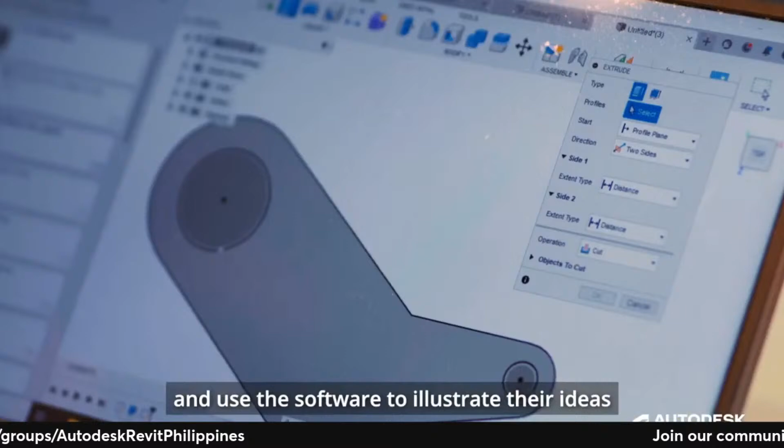We have donated about 20 canes to the Society of the Aged Sick and St. Luke's Nursing Home. Fusion 360 allows students to draft their design and use the software to illustrate their ideas and inform their discussions. Fusion 360 can be easily downloaded to a student's personal laptop and it is user-friendly.

Our students knowing Autodesk products gives them an edge in terms of future employment. To be a leader in manufacturing education, one has to keep updated with industry needs and standards. It is essential that one trains students to have the latest skill sets which help them progress in their career.

We connect with industry through facility visits, seminars, and attending professional development courses and outreach programs. I think Autodesk plays a role in fostering and facilitating our connection with industry. Some of our students are already connected to EIA companies that use Autodesk. My advice to students is to never stop learning.

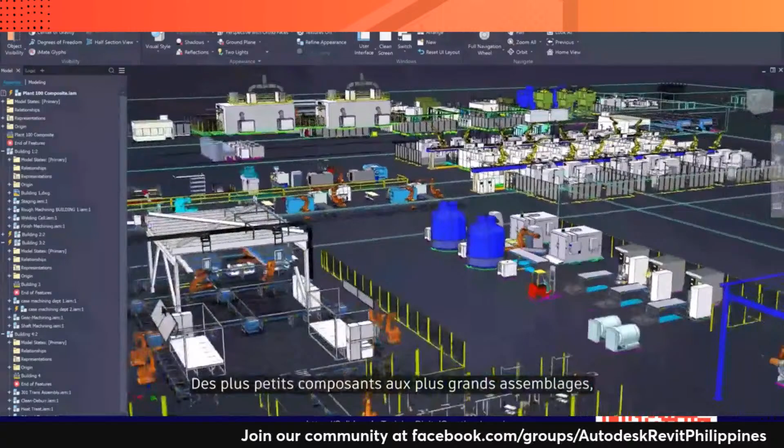From the smallest components to the largest assemblies, Autodesk Inventor is the 3D CAD software you need for everyday projects and ambitious challenges. Inventor puts powerful mechanical design, documentation, and product simulation tools at your fingertips to help you innovate with agility, collaborate effectively, and win more business.

Inventor provides you with a stable and responsive environment to help you get your projects to production faster, with a complete set of tools for sheet metal, welded frames, tube and pipe, and electromechanical design, plus direct access to a robust content library and engineering calculators.

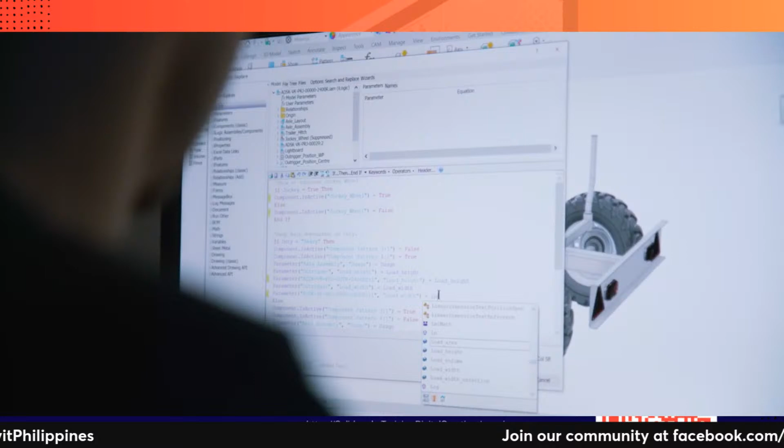Shave days off your projects by rapidly configuring products using iLogic design automation technology. Speed up design reviews with a cloud-based tool that protects your intellectual property. Connect directly with AutoCAD for your project workflows.

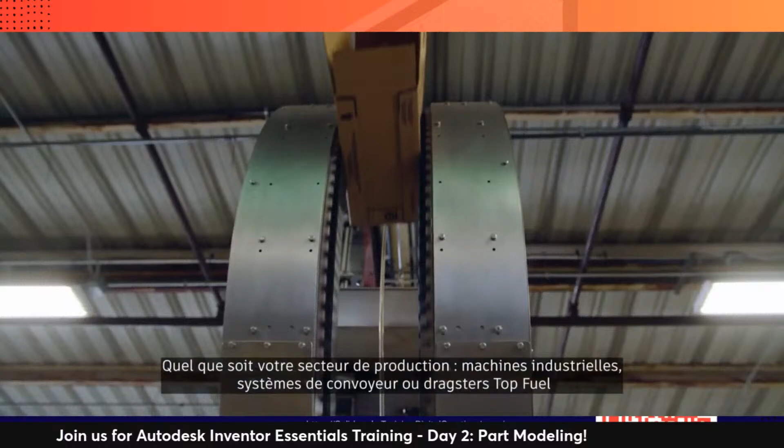You can extend the power of Inventor with a subscription to the Product Design and Manufacturing Collection to take your designs further with 2D and 3D workflows, cloud-based design and manufacturing, factory planning, and high-end visualization. Regardless of what you make, industrial machines, conveyor systems, or top fuel dragsters, solve your most interesting problems efficiently and effectively with Autodesk Inventor.

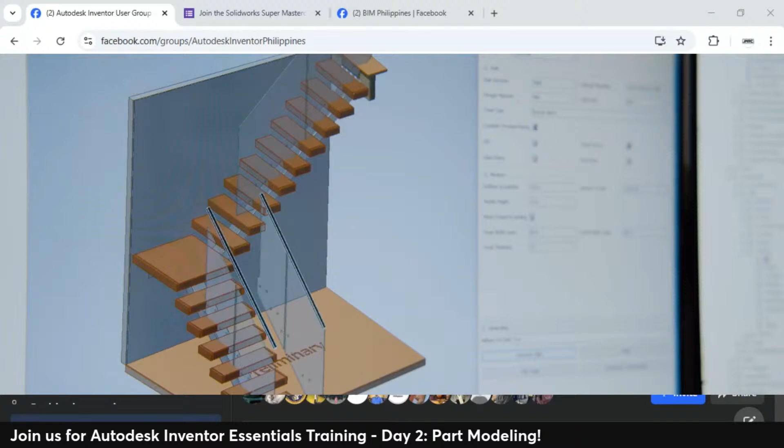We turned to the Autodesk Product Design and Manufacturing Collection. Autodesk Inventor and iLogic has allowed us to automate the engineering and project management process. A lot of things in stair design are repetitive tasks, and iLogic enables us to automate a lot of those so that a human operator doesn't have to get lost in the minutia.

So let's say we decided to pull a foot off of that floor, we added a wall there. I would come in and modify the environment, tell it the length, put in either an absolute, or in this case, if they said we subtracted 12 inches, I'd do it. And I would just tell it to update all my glass. It's going to automatically engineer it for me, make it so that it meets all building codes that our product is certified for, and generate shop drawings and production prints as it goes.

It's that easy. We're manufacturing 10 systems, 20 systems a day right now.

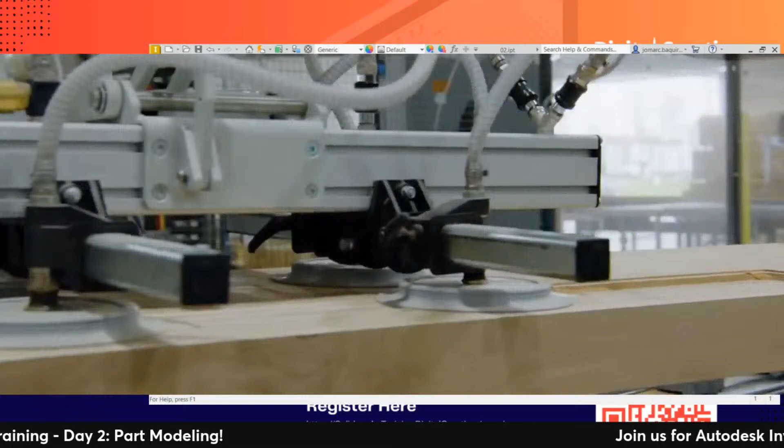With Inventor CAM, we take the exact model that is part of our automation that we've used to design for the customer, and it's already toolpathed, so that production engineer is just posting that right to the machine. It's a huge time savings, and it's a quality assurance. As we build in more and more automation, we continue to drive down the potential errors that a user can make.

Welcome to Viewrail. Thank you. Have a seat.

We leverage the Forge viewer. It enables the customer to view on a web page on their phone exactly what we are engineering and how it will fit into their space.

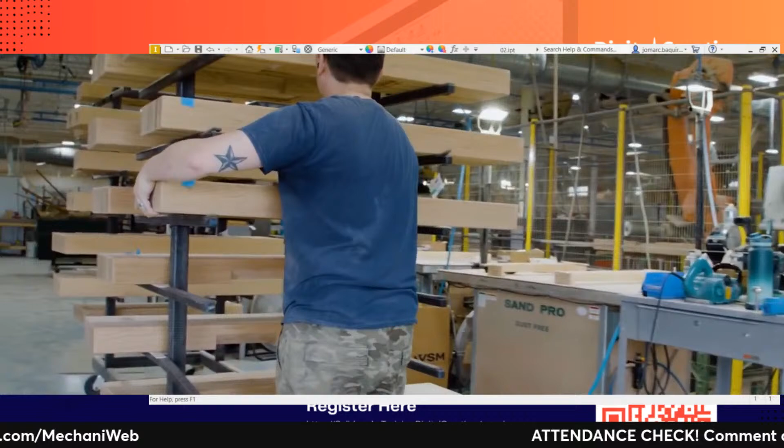This looks amazing. We are now over 10 times the size that we were when we started all of the automation. In the next 5 years, we're going to grow from $100 million a year in revenue to $500 million. Automation is critical for scaling at the rate that we're going. We would not be able to do the things that we are doing today and looking into the future without the Autodesk tools.

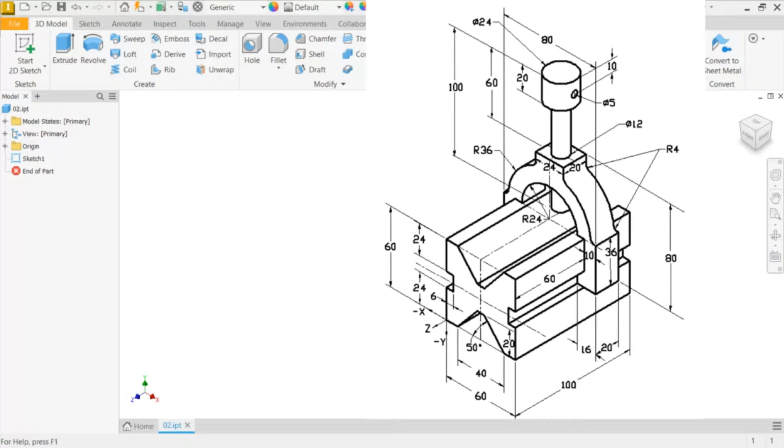Notice last time we had this activity, a challenge for our sketching. I want you to recall this activity, so feel free to screen capture this challenge. Again, our goal is to create the sketch for this assembly, similar to this. Notice this is inside Sketch 1, so all of these target parts are in Sketch 1. Now let me demonstrate how to do this sketch.

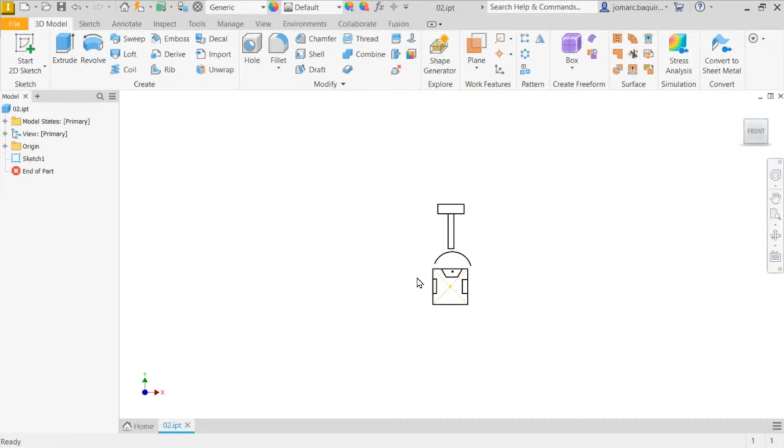Definitely in this exercise we'll be challenged to quickly learn and apply what those constraints are. I'm going to go to front view, zoom in, and activate Sketch 1. Hovering over Sketch 1, I can right click and select Edit Sketch. Notice I can move these entities by left clicking and holding, because these are not yet fully constrained.

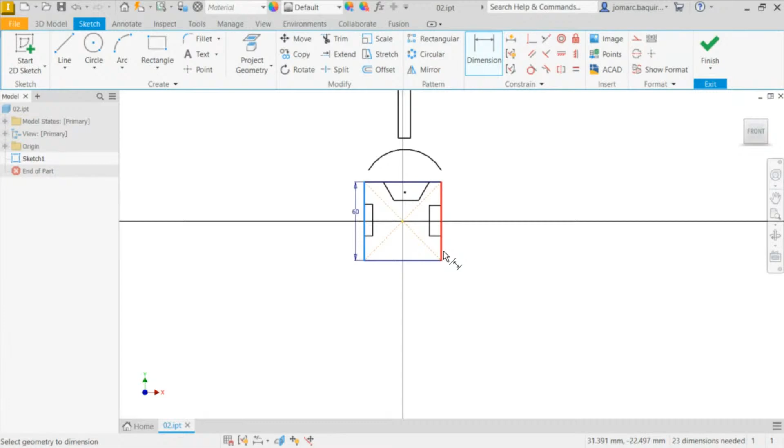Going back to our activity, I am seeing this square has a 60 in dimension. I'm going to hit D, the shortcut for dimension. Let's dimension this one to be 60. Again, this one to be 60 as well. So this one to be 24. What else? So both are 24.

Selecting this horizontal line, this horizontal line, notice this is currently highlighted in blue. I can select, while this is highlighted, these values, and hover over 24. Notice there's an FX letters there. I'm going to left click. So what happened here is that dimension ID D3 now inherited the dimension of D2, which has a value of 24. Selecting OK or hitting the green check mark. So if I have this as 20, definitely this will adjust to 20 as well. So double left click to revise or update this dimension. Next.

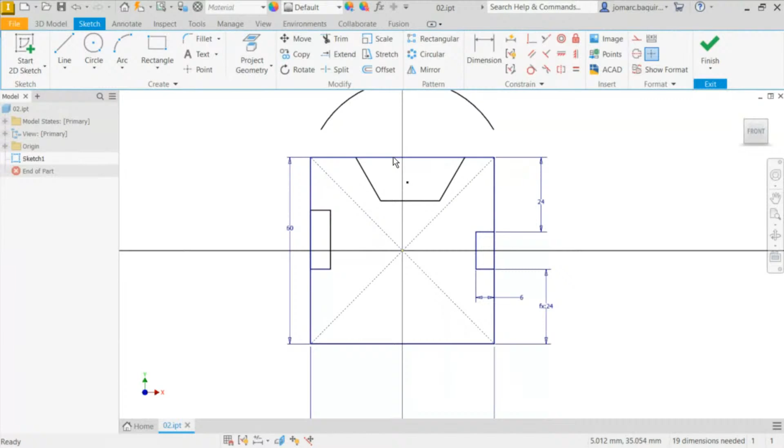What else? I'm seeing this as 6, right? Hitting enter. Next, I feel it would be much better if I just mirror this entity out to the left side.

So to do that, of course, we need to create a mirror line for us. But first, let me target this area. What's the dimension for this? So this one is 20. This one as well is 50. The angle between, same here, 50.

So repeating what we did a while ago with regards to parameters, fx, that fx with D7 dimension highlighted, this value is highlighted in blue. I'm going to left click on 50.

Next, I'm going to drag this as well, and align the midpoint and the midpoint of this horizontal line vertically. I'm going to head up and select vertical constraint. So this is the midpoint for this line, and selecting the midpoint for this line. So both are now aligned.

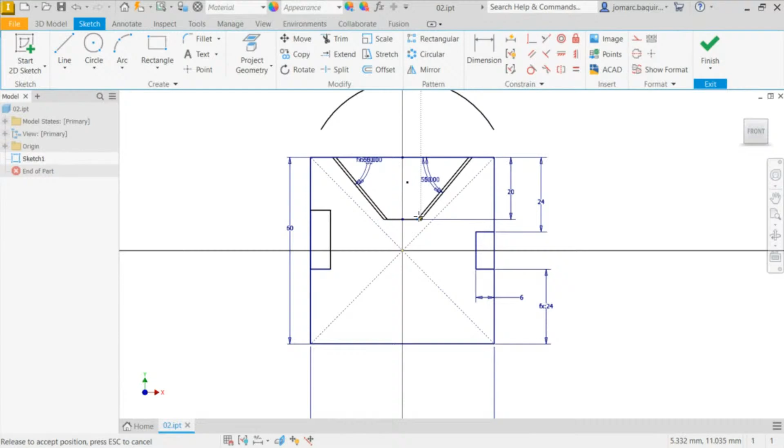Let me check, I'm holding my left mouse button and moving these entities. So from here, I know what's lacking is the dimension for the top. Hitting D, selecting this point and this point, typing in 40. Let me move it, it cannot move anymore, which means it's fully constrained. Same with this. So I'm going to create a window selection now and delete this rectangle.

Next, I'm going to hit line, creating a line which will serve as our mirror line. Left click here and double left click. Left click here and double left click. Now I'm going to select these two lines and convert them into a construction line.

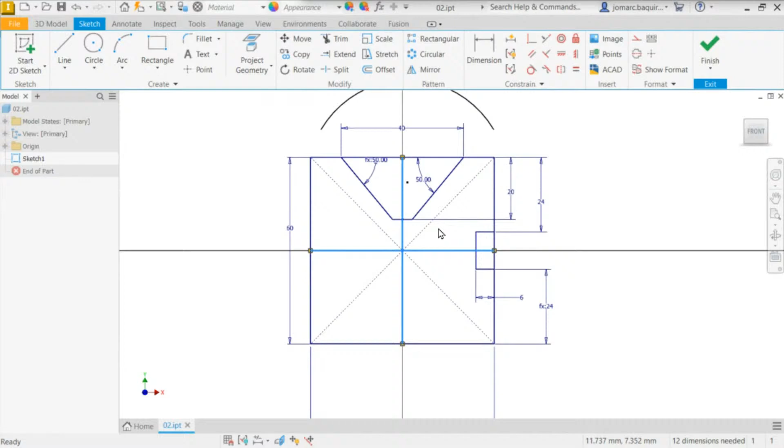Up above on our ribbon, it's construction on the upper right, if you're seeing this. Another method is I can right click and select construction. So selecting construction, next I'm going to create a window selection for this.

And under pattern, I'm going to select mirror. So selecting these entities, the mirror line to be this construction line. Selecting apply, selecting done. So let's repeat the procedure.

I'm going to select mirror, selecting the items or entities, creating a window selection, making sure this rectangle is inside that window. Release, activating mirror line, selecting this vertical construction line, and selecting apply. Selecting done.

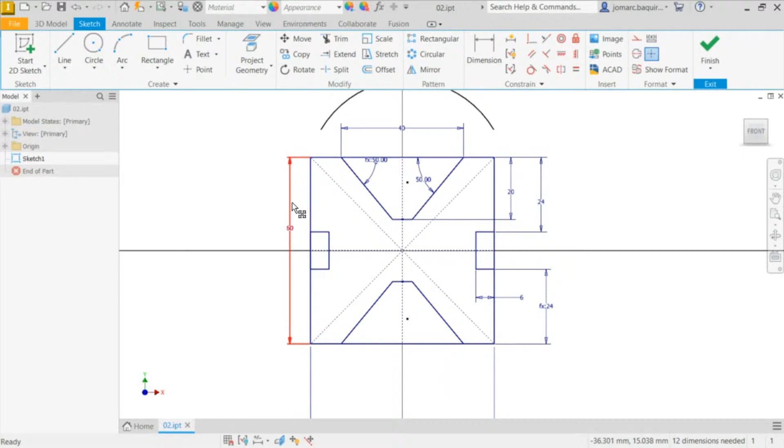So from black, it's now blue in color. Next, how about creating this part? Hitting D. The diameter for this, it's 24. So typing in 24. Going to create a window selection and move this.

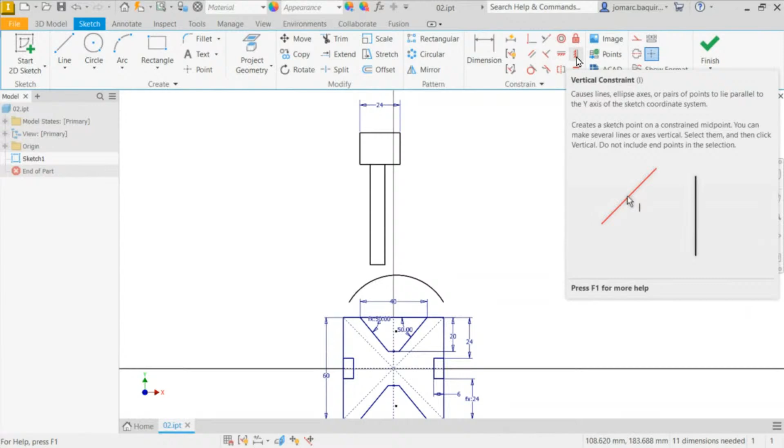Move these lines. So next, I'm going to apply the method we did with regards to vertical constraint. Up above under constraint, we're going to align vertically the midpoints of this horizontal line and this horizontal line.

Next, let's define the diameter for this. Indicated in the drawing, it's actually 12. I can actually move this somewhere here so it won't bother us. Next, this one to be 20.

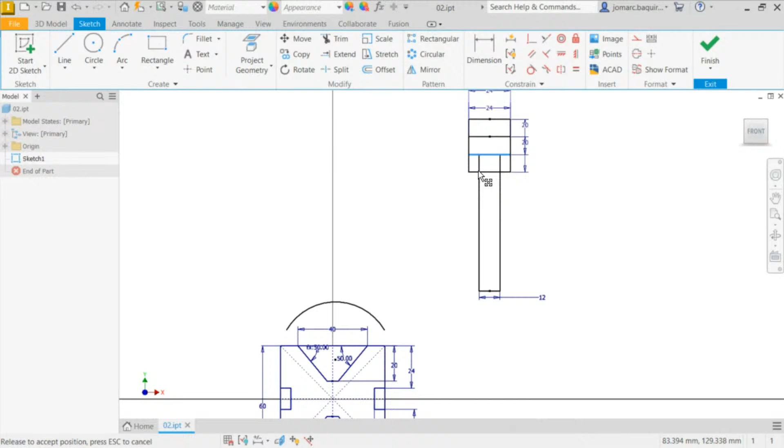What else? The whole length. Notice if I left click and hold, by seeing the movement of entities, I am seeing what constraint is needed. Here, to prevent this from going up and down, we need to key in that 100 dimension. Selecting this line, left click here to place our dimension and key in 100.

And from here, I can create a window selection and move this somewhere here. So I feel that this one is now affected. Oh, not yet. Okay, so let's now recreate the sketch for this entity.

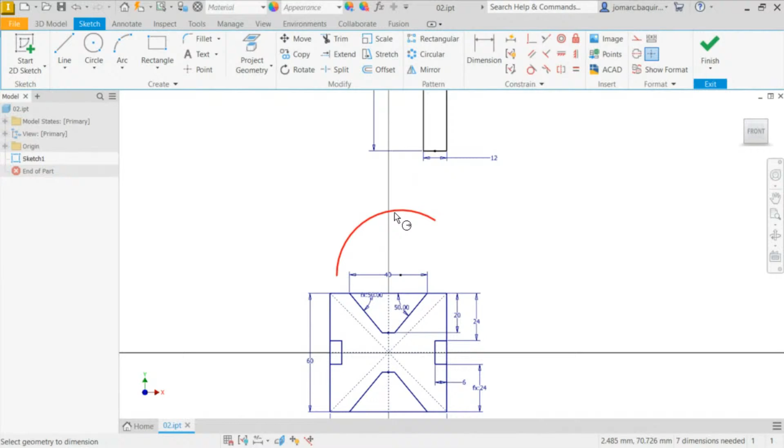Okay, so what I'm seeing, this has a dimension of 24. But first, I'm going to offset this, my preference, offsetting that. Hitting D for dimension, radius. I'm going to define this as 36. And same with this one, to be 24.

Also, I'm going to be creating lines somewhere here. Left click, double left click to end that chain of lines. So this is defined as 24. Hitting escape.

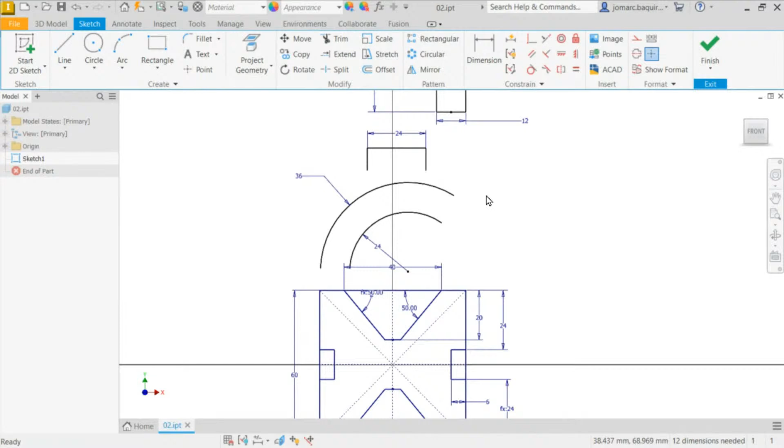Next, I'm going to have this coinciding with this arc. So selecting coincident, this line terminating this arc, this line, this endpoint. Again, this endpoint to this arc.

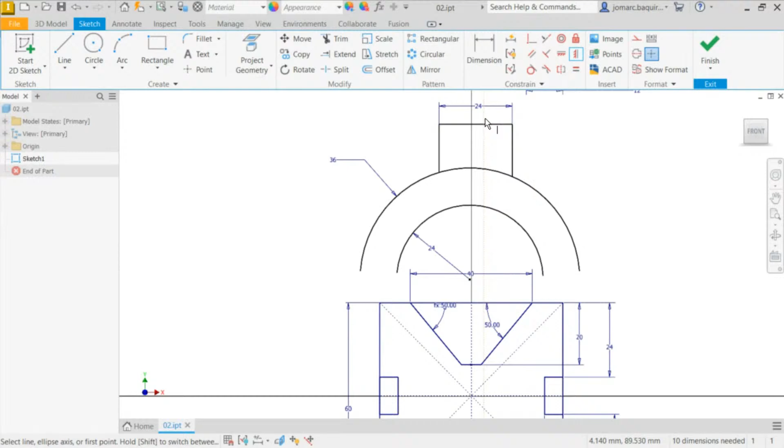Okay, so nudging these points, pulling them. Next, notice the center point of this arc. I'm going to align the center point of this arc with the midpoint of this horizontal line.

I'm seeing this center point should be coincident with the midpoint. So let's select coincident, selecting midpoint and this, selecting the center point and this midpoint. I'm going to pull this up. Same here.

And I'm seeing a fillet, so I'm going to select an arc. Let's create an arc here. Notice that symbol as I place my cursor here, that's the tangent symbol. Left click. Now those fillets have a radius of 4.

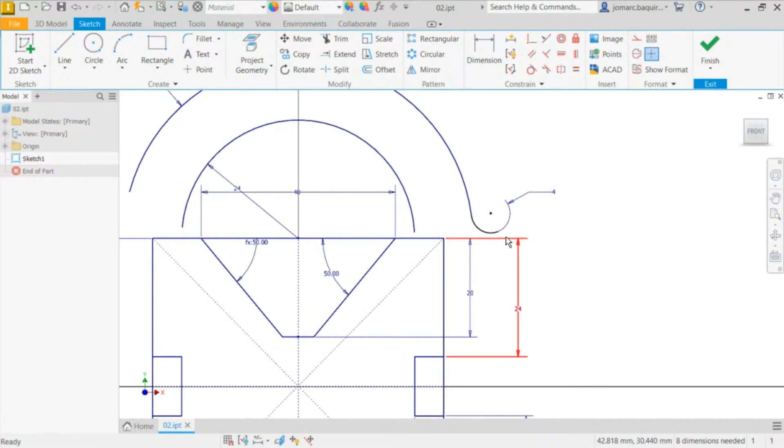So hitting D, typing in 4. Pulling this down. Next, I'm going to hit L for line. Let's create a line, vertical, all the way here, going up to here.

Next, the dimension for this is 16, hitting D, 16. Selecting this line and this line, keying in 16. Or moving this dimension over here.

Next, I am seeing this point should be aligned horizontally with this point. So I'm going to head over to horizontal constraint, selecting this point and this point.

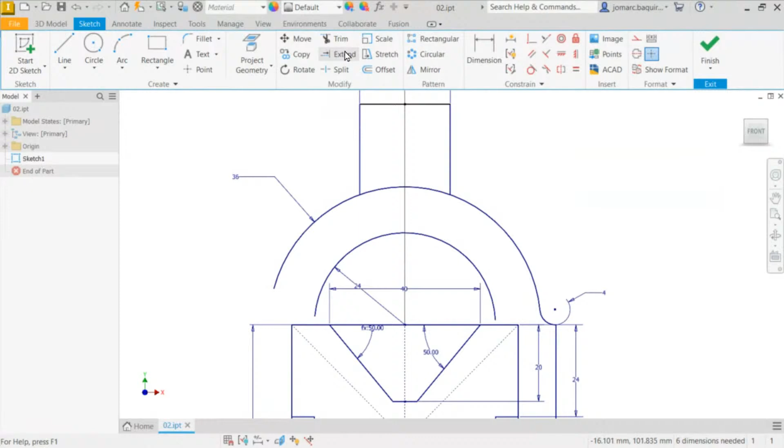Next, let's remove this arc. I'm going to head up to modify, selecting trim. Let's trim this out. Also, again, there's a fillet here, so I can select fillet under create, selecting this arc and this line.

Now, the value to be 4. So again, this line and this line. Hitting enter. Or I can double left click this dimension and simply select this dimension as well.

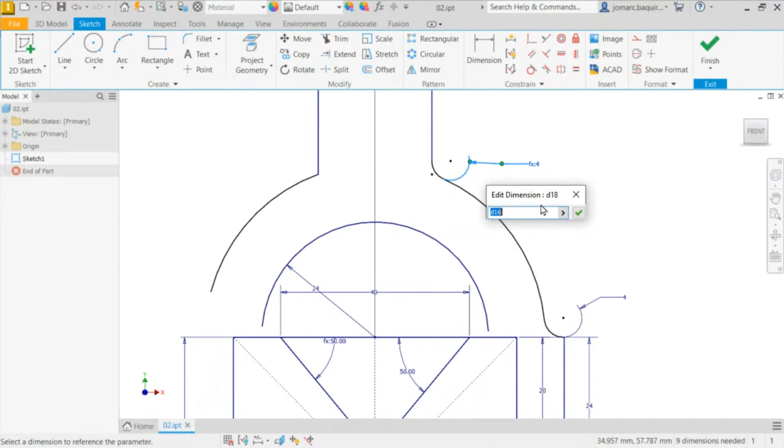So whenever D16, the dimension ID for this arc, whenever we change the value of this, automatically it will update the dimension of D18. So same with what we did a while ago, selecting fillet, selecting this line and this arc. Double left click here to revise the value of this dimension, selecting this dimension, D16, hitting enter.

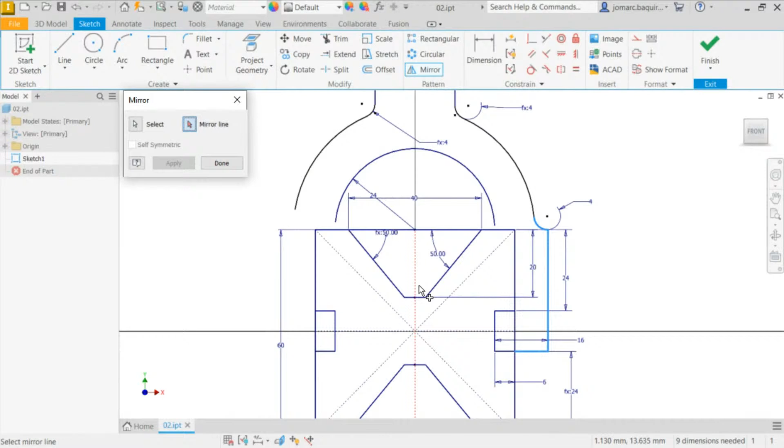So in addition to that, because we have a vertical construction line, we can mirror these entities to the left side. Let's do that, heading over to mirror. For the mirror item, selecting this arc, this line, and this line. Activating mirror line, left click. The mirror line to be this vertical line, selecting apply.

Hitting escape. Let me move this dimension over here. And of course, we need these two points to coincide with each other. So let me head up to constraint, selecting coincident, selecting this point and this point. And just to make sure, I'm going to select tangent, selecting this arc and this arc. So they are now both tangent.

And definitely this point should be touching or coinciding with this line. So selecting coincident, selecting this point and this line, this point and this line.

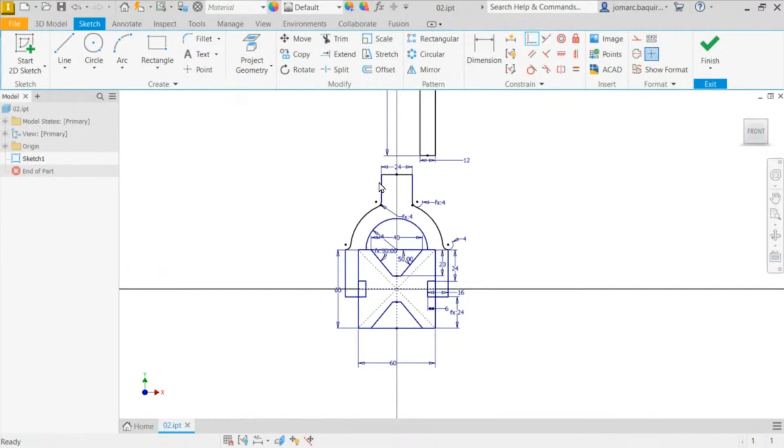Okay, so inspecting, moving entities to check if this is not yet fully constrained or defined. So this one, obviously not yet fully defined.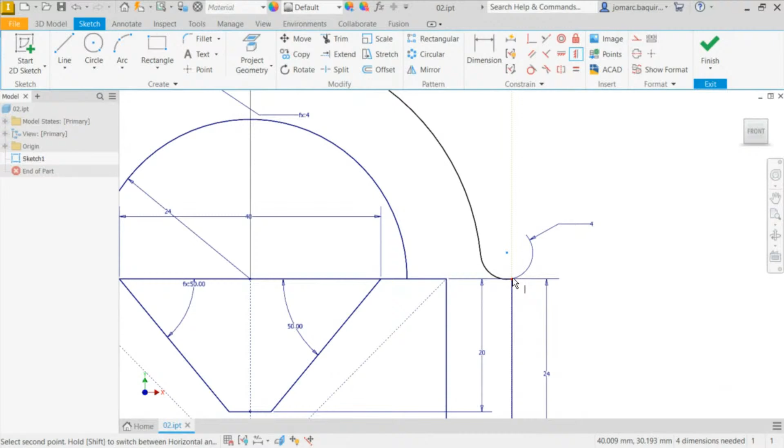So what I am seeing here is we may probably align this center point to this point vertically. So going to the right side, I'm going to select vertical, selecting this point and this point. So everything now is in blue, which means fully defined.

I'm seeing this as black, so definitely this one requires a dimension. And based on our exercise, the dimension should be from here all the way here to be 80. Hitting enter.

Okay, so I can fully define this peg or the shaft that will go here. But for now, I'm going to leave this out.

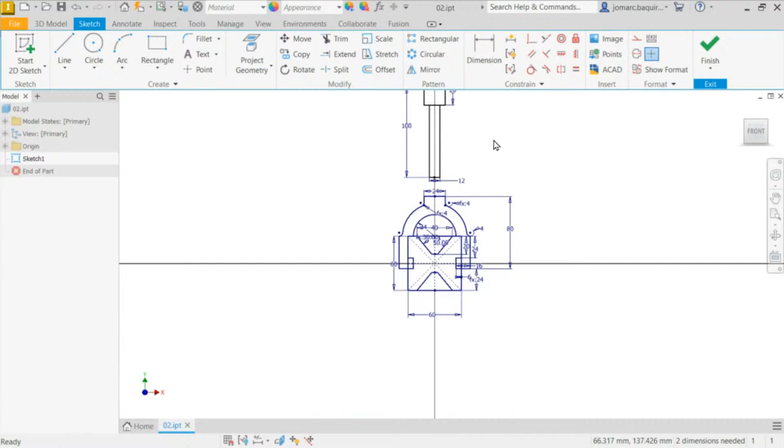Okay, so I want you again to recreate what I did. And on our third meeting, which is the topic of creating assemblies, definitely we will turn this into a dynamic assembly. But for now, relating this to our first session, which is all about sketches and constraints, I'm showing you how we can create an assembly through a mere one piece of sketch.

So again, these are all made into sketch 1. So from here, I can select finish. I can select E for extrude. I can select this profile.

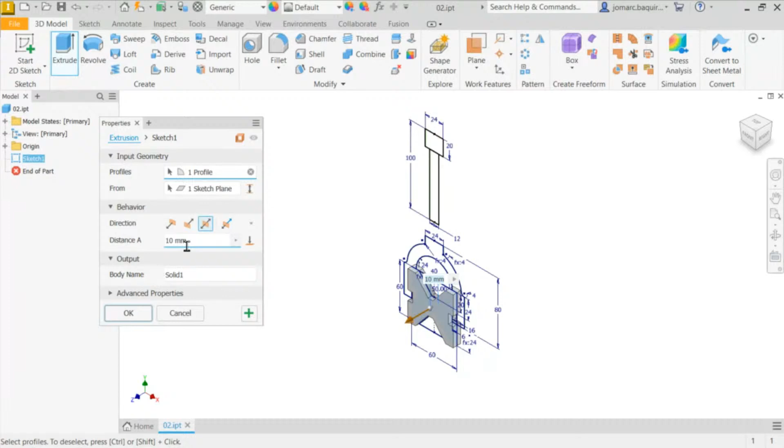For the direction, I'm going to select symmetric, and its value to be 100. Hitting enter, I'm going to expand extrusion 1. Right click.

And turn on the visibility of sketch 1. And actually, based on that extrusion, we have created a solid body. It's registered here as solid 1. So I'm going to head over to solid 1, right click, and turn off its visibility. Turning this off. Hitting E again for extrude.

This time selecting this profiles. So again, for the behavior direction, I want this to be symmetric, and for its thickness, it's defined as 20.

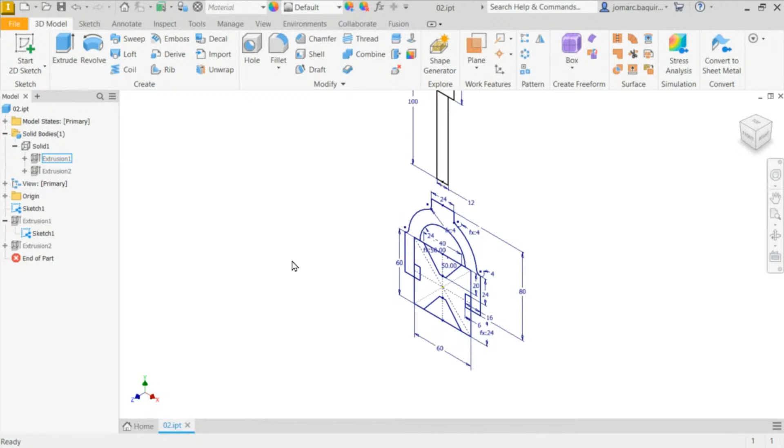So let me check. Edit sketch. Okay, this is actually the extrusion. Edit feature.

So I want its Boolean operation. Take note, the Boolean operation with extrusion, or solid 1, turned off. We prefer the Boolean operation to be new solid. Notice as I hit OK and turn on the visibility of solid 1, we now have 2 bodies. So take note, this is just one part, a part having multi-bodies.

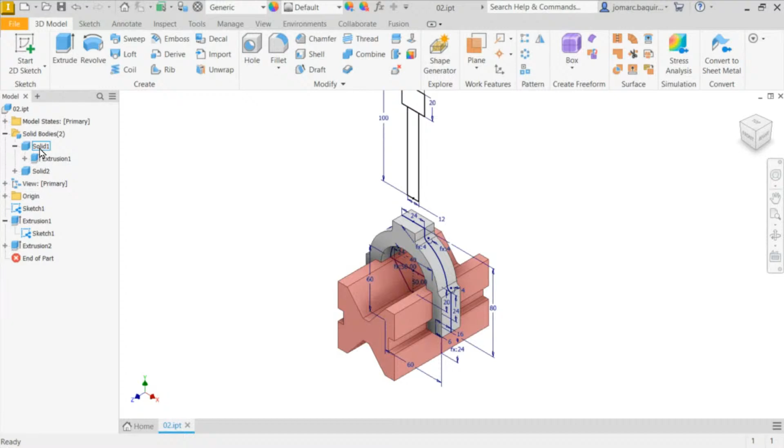Okay, so let me again turn off the visibility of these bodies. Right click, turning off its visibility. And next, definitely, this shaft. So to create this feature, this should be a revolved feature.

So for revolve, we need an axis. I'm going to head over again to our main sketch, right click, selecting edit sketch. Going to create a line from this midpoint all the way down to this midpoint. Selecting finish. Next, let's select revolve.

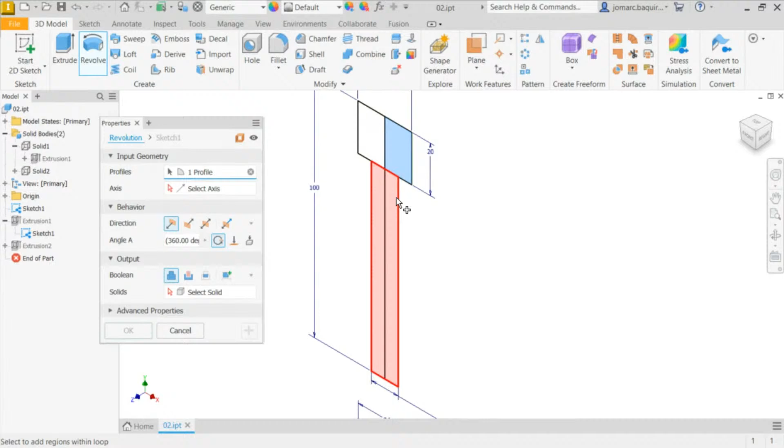And for the profiles, I'm going to select this profile. And for its axis, I'm going to select this vertical line.

Okay, checking again. And for the Boolean operation, it's new solid. Selecting OK.

So from here, I'm going to go back to our solid 1. Show its visibility together with solid 2. Enable its visibility.

Okay, so I want you to set this aside and save. On our third meeting, as we discover assemblies, we will turn this into multi-parts, because definitely this is currently a single part having multiple bodies. So I'm going to hit save for this.

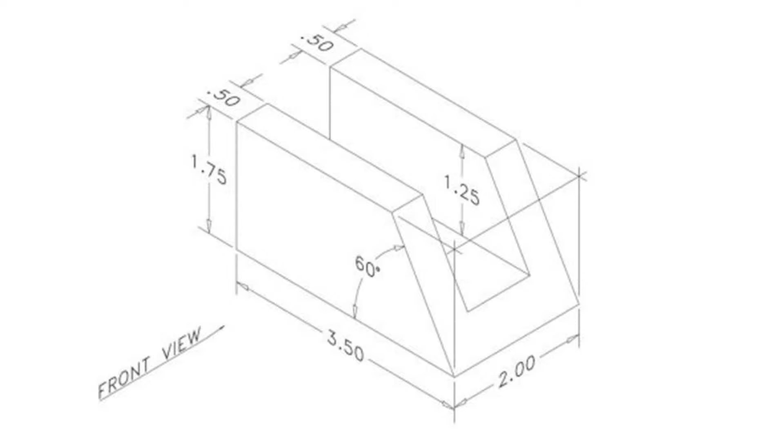Okay, so for our next activity, I would like to challenge you in creating this part. I want you to create this part. Definitely this is a simple basic part that will consist of more than 2 sketches.

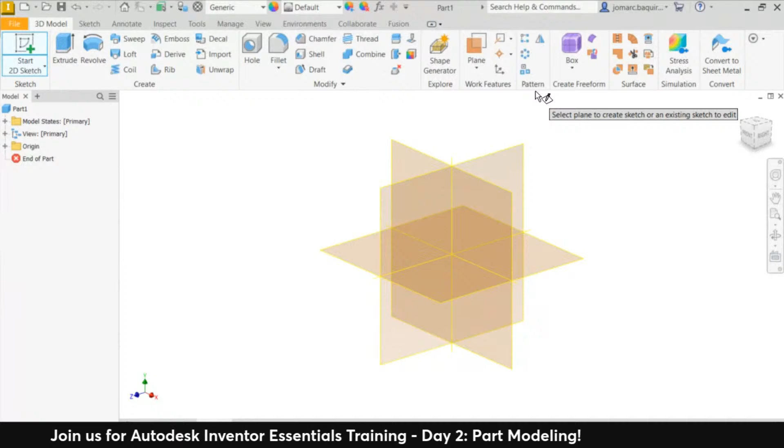Hitting S for sketch. For this, my interpretation is I'm going to create a sketch on the XY plane. Next, I'm going to hit L for line and quickly create this sketch. Double left click. Obviously this line needs to be perfectly horizontal. Selecting this line, I'm going to select horizontal constraint, and probably this is now perfectly horizontal. So it is.

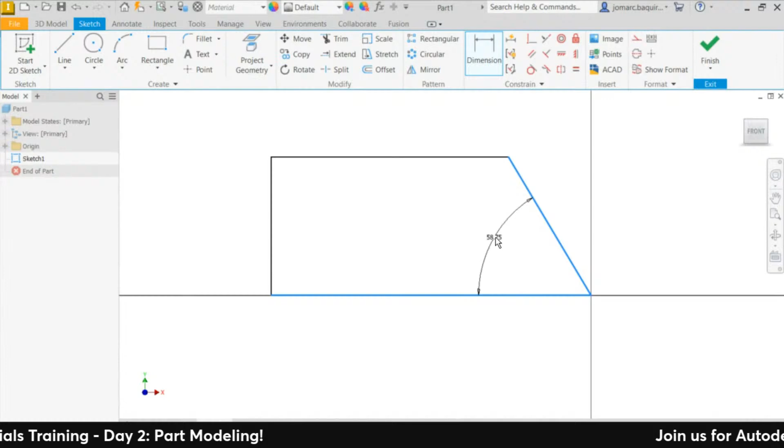Next, I'm going to hit D for dimension, selecting this line and this line. Left click here to place that angle dimension. So keying in 60. Same with this line and this point to be 3.5. Let me zoom out, hit D, this one and this one to be 1.75. Hitting escape.

So checking, this is now fully defined. Let's now hit E for extrude.

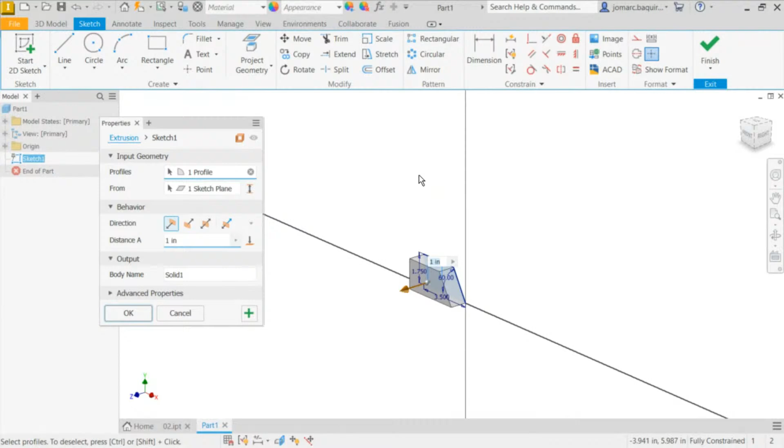Again, notice the preference is always having the coordinates, the 0,0,0 X,Y,Z, to be always at the center or middle. That's why, as much as we can, if it's symmetrical, we select symmetric for the behavior. So this one is 2. Hitting enter. Next, we need to create a cut extrusion for this part.

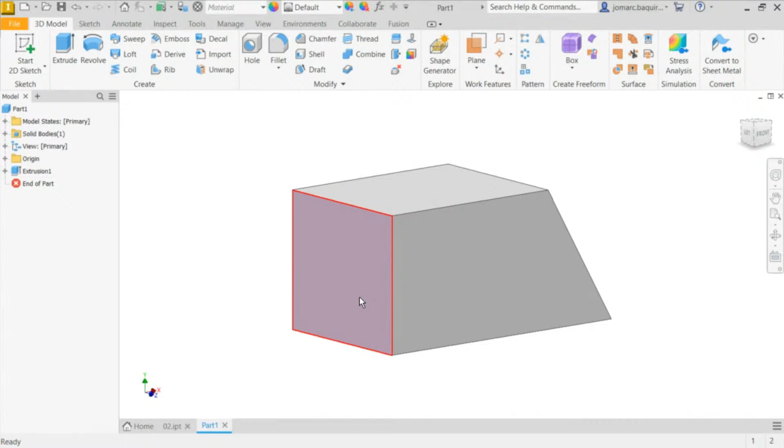So I'm going to rotate this. I prefer sketching on this side. Okay, selecting this face, hit S for sketch. Next, I'm going to select rectangle and create a rectangle here.

Next, hit D for dimension. I am seeing the 1.25, selecting this edge and this line, 1.25, and we have the 0.5 on this side. So 0.5, selecting this edge, this line, left click here to place our dimension.

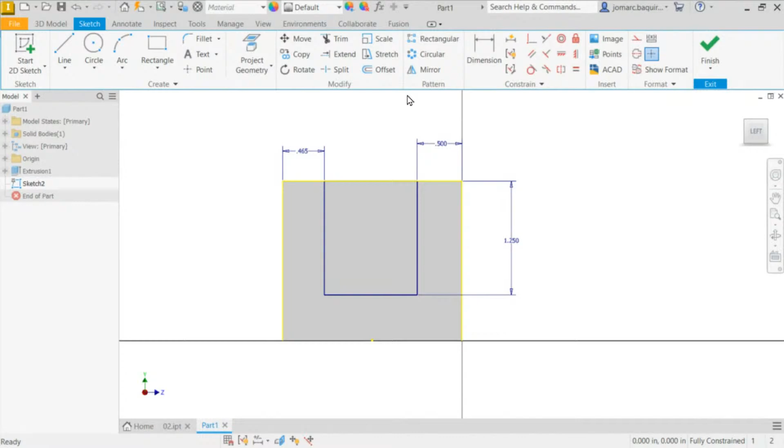But this all only applies to something that is an entity, not a dimension. So I'm going to double left click 0.465, or dimension D7, and left click on this dimension, which is D6. Selecting the green check mark and selecting finish. We now have the profile for our cut extrusion.

Hitting E, I'm going to pull this arrow to the left, making a cut extrusion. And I prefer the distance to be through all. Hit OK. So that's how we quickly created this part modeling challenge.

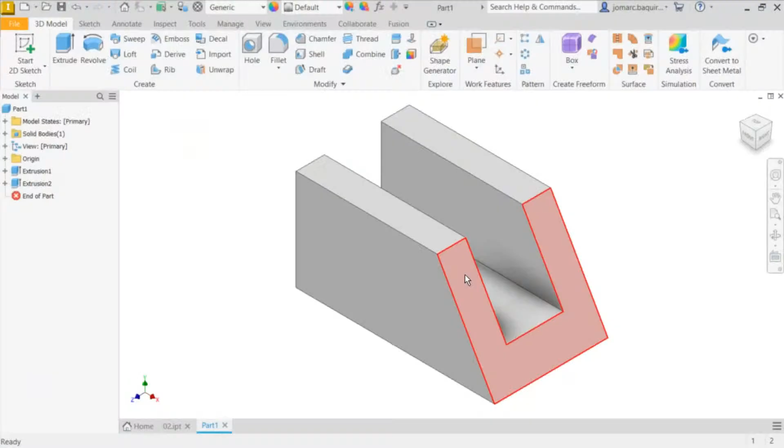Next, I want you to create this challenge. Feel free to screen capture this next challenge.

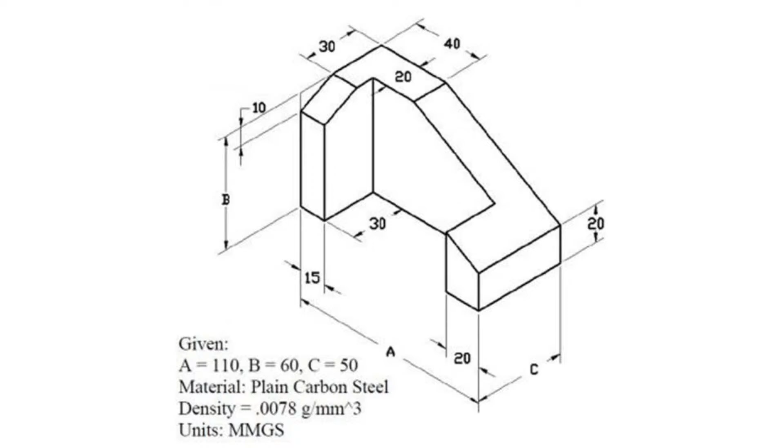Okay, let's now do this challenge. I'm going to hit Control N again, and this time for the template, selecting metric, selecting standard millimeter.ipt. Double left click. I prefer always hitting F6 for isometric view.

I'm going to hit R, or simply S, to go to sketch mode right away. So I'm going to select the XZ plane and rotate the view. Notice here beside our view cube, rotating this counterclockwise. I'm seeing the dimensions are referring actually to the left corner of this part modeling challenge.

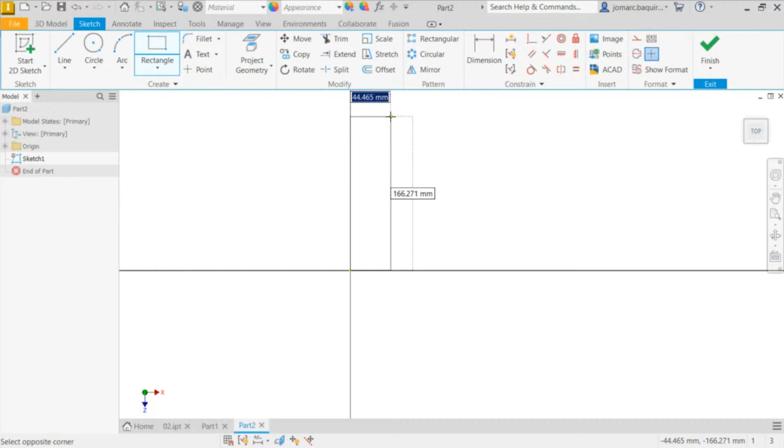With that, I'm going to select rectangle, quickly creating a rectangle here, a rectangle here, and a rectangle here. Or of course, you may create a series of lines like this one. You can also create that series of lines and then apply constraints, but I prefer this one just to be quick.

Next, I'm going to select this line. Based on what I am seeing from the behavior, this is currently collinear. These two lines are now collinear with each other. So hitting D for dimension.

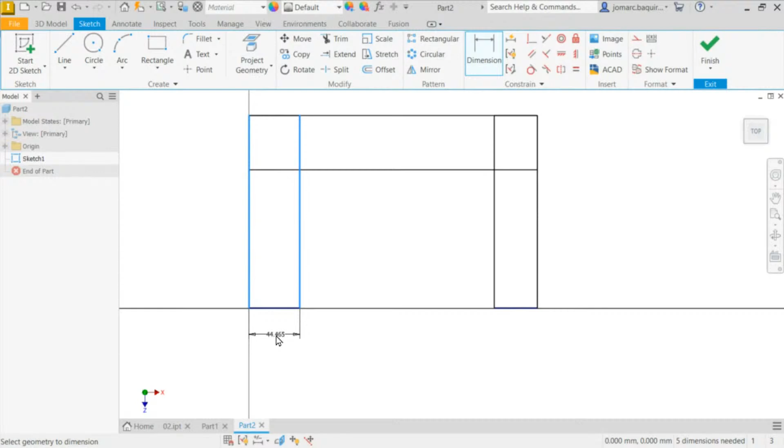Let's define this to be 15. This to be 20. Next, this to be 30. And for A, from here to here, it's 110. From this line up to this line, this one should be 50, named as C, dimension C.

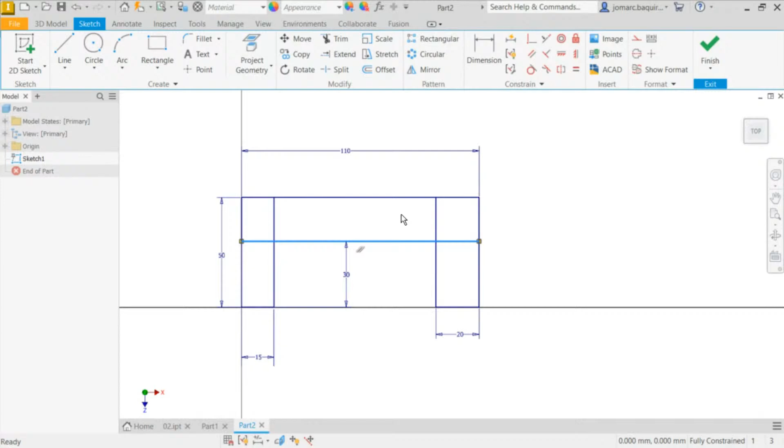It's now in dark blue color, which denotes this is now fully constrained. Let's now select finish, hit E for extrude, selecting this profile. I'm seeing B having a dimension or value of 60. Keying in 60, extruding this upwards. Selecting this.

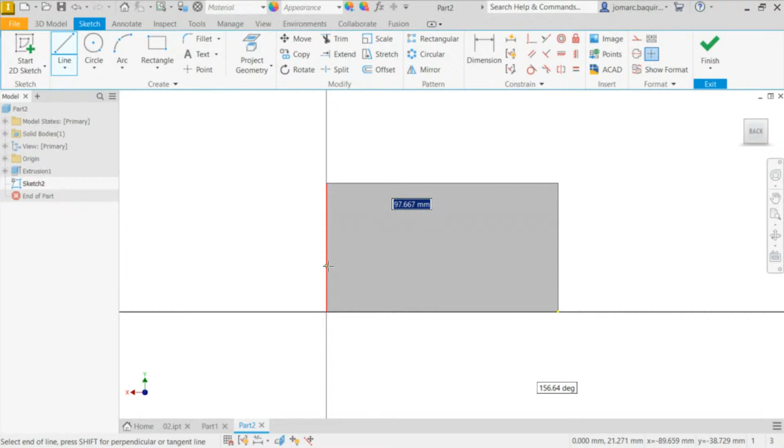Next, there's a taper here on this side. My take on that is I'm going to create a sketch here. Hit S and create a diagonal line coming from this edge all the way to this vertical edge. Checking if this is with the coincident constraint - that one has, and this one doesn't. So let's head up to constraint, selecting this point and this vertical edge.

Let's now apply dimension, hitting D, selecting this point and this edge. Defined there as 30. Same with this point, this edge to be 20. We're done, and this is now in dark blue, which is fully defined. Selecting finish, selecting E for extrude.

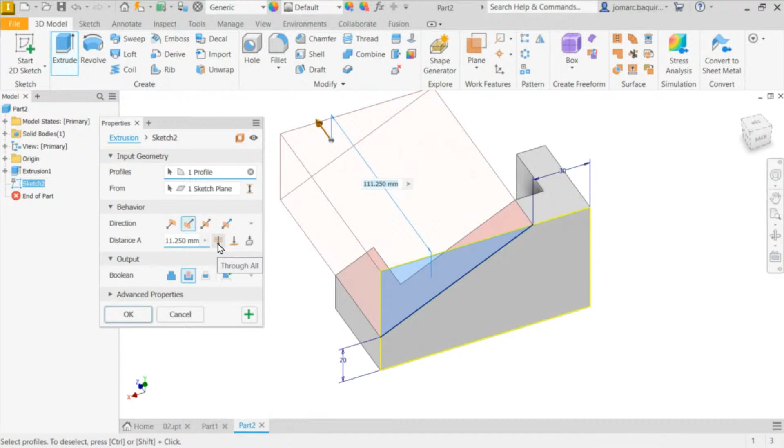Let's make this as a cut extrusion. I prefer through all for the distance. Selecting this, hit F6. Same procedure with the feature here, or you may also create a chamfer. But for me, I prefer recreating that technique we did a while ago.

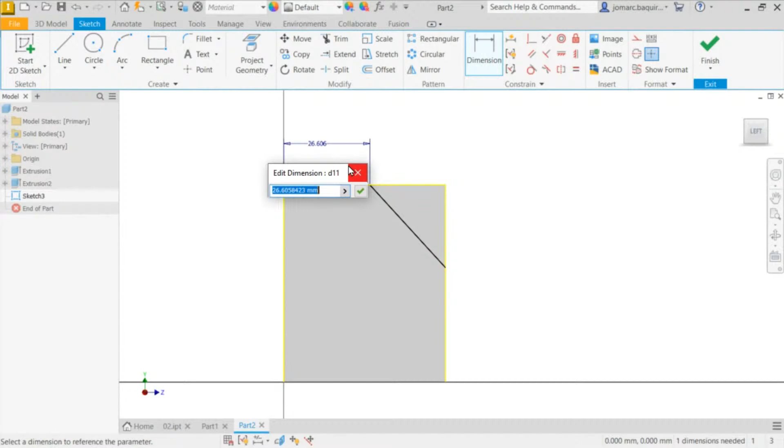Selecting this face, hitting S, and creating another line here. Left click, double left click. So checking, hit D for dimension. It's 30 from that point to this edge, and 10 for this edge and this point. Keying in 10, hit E for extrude.

Pulling this to the left. This time, instead of through all, I want that extrusion to be always up to this face. Selecting OK. And we have now created our third challenge.

Hoping this gets you off your feet, and hoping this challenges you to create our next batch of challenges. So I want you to screen capture this, challenging you to recreate this part model, this simple part model.

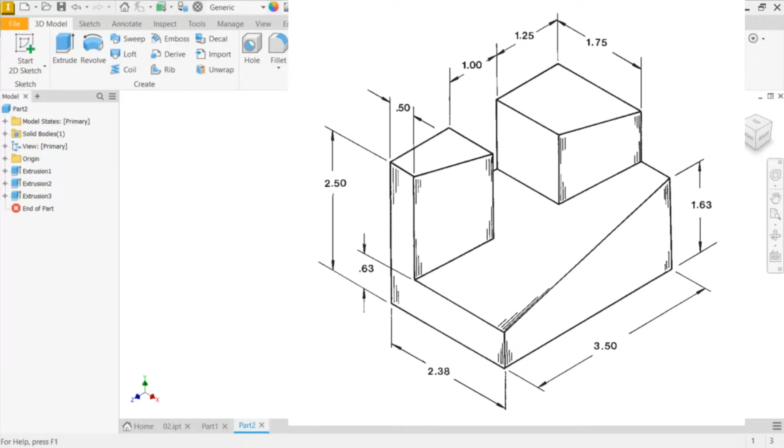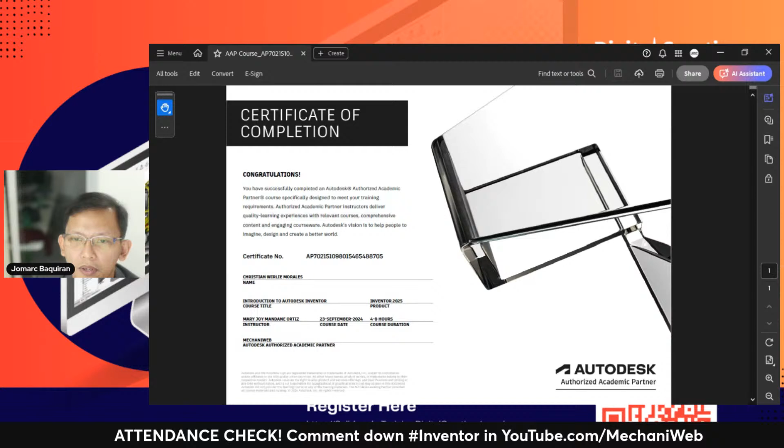From the smallest components to the largest assemblies, Autodesk Inventor is the 3D CAD software you need for everyday projects and ambitious challenges. Inventor puts powerful mechanical design, documentation, and product simulation tools at your fingertips to help you innovate with agility, collaborate effectively, and win more business.

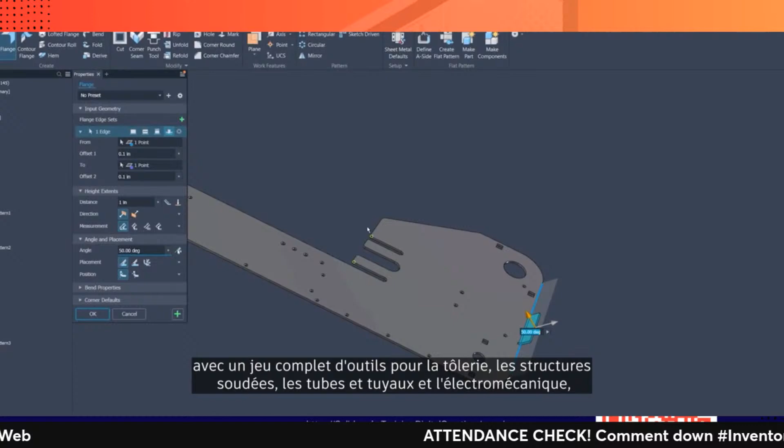Inventor provides you with a stable and responsive environment to help you get your projects to production faster, with a complete set of tools for sheet metal, welded frames, tube and pipe, and electromechanical, plus direct access to a robust content library and engineering calculators.

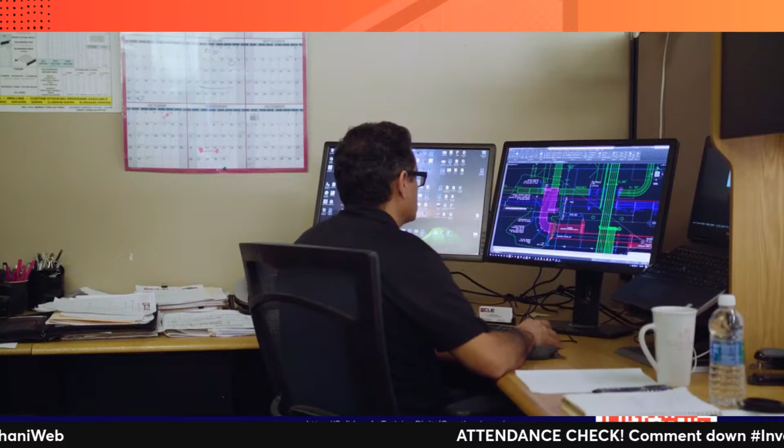Shave days off your projects by rapidly configuring products using iLogic design automation technology. Speed up design reviews with a cloud-based tool that protects your intellectual property. Connect directly with AutoCAD for your project workflows.

And you can extend the power of Inventor with a subscription to the Product Design and Manufacturing Collection to take your designs further with 2D and 3D workflows, cloud-based design and manufacturing, factory planning, and high-end visualization. Regardless of what you make, industrial machines, conveyor systems, or top fuel dragsters, solve your most interesting problems efficiently and effectively with Autodesk Inventor.

These cars are so violent. It's amazing how much damage we can do in 3.5 seconds. You're going to win or lose by merely inches, thousandths, ten-thousandths of a second. Everything has to be built right. Everybody has to be on their game. Hopefully you're on the other side of that, and you get the win.

Kalitta Motorsports is a professional drag racing team. We compete at 24 events across the country. We use the Product Design and Manufacturing Collection from Autodesk. It makes our job so much easier. Not having to use multiple software packages saves us a ton of time. So Inventor is helpful because it's tied in with everything. You do all your modeling, you do your drawings. When you update the model, it updates the CAM.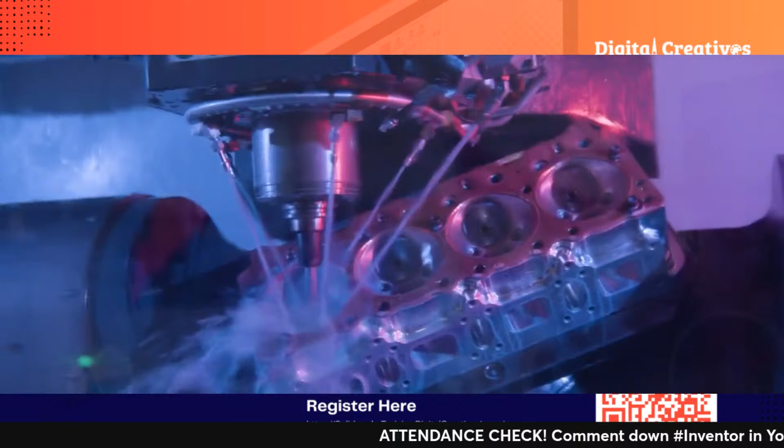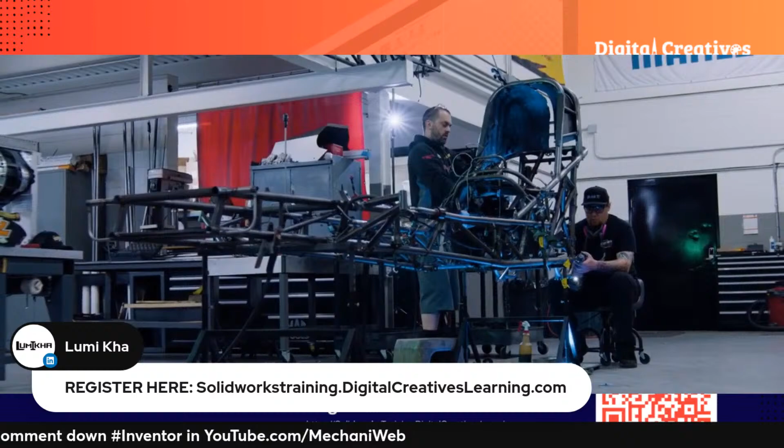These cars go over 330 miles an hour and they travel 1,000 feet in less than 3.5 seconds. To accomplish something like that is really tough on the parts. This is not a business where you can make a ton of mistakes. If we don't do our job down to the smallest detail, that driver's life is in our hands. Everything has to be built right. Everybody has to be on their game.

Welcome to Charlotte's Z-Max Dragway for the 4-Wide Nationals. Safety is number one, and then second would be performance. We need to make sure our equipment's strong enough and light enough where we can outperform our opponents. Currently, they're finishing up the track prep. We've got top fuel dragsters up next for you. At the 4-Wide Nationals, we had the Autodesk car on Doug Kalitta's top fuel dragster.

My expectation is to win every race we go to. In lane 2, we have Doug Kalitta with the Autodesk car. Inventor is helpful because races in our league can be decided by thousandths of a second. So if we find something on a part to make it a little bit stronger, a little bit lighter, or a little bit better than what everybody else has, that makes us a big part of winning races.

Kalitta crossing the finish line first, clocking in over 330 miles per hour. Seeing something get made and then get put on the race car, and us going out and running over 300 miles an hour, that's pretty neat to see.